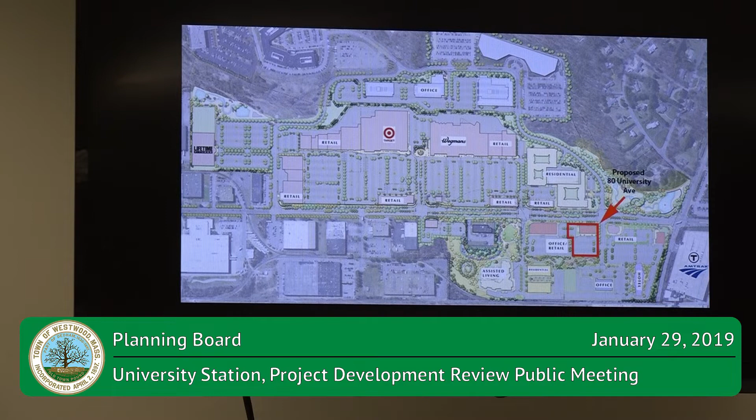This is the normal orientation that you've been seeing University Ave for some time. So remember, north is to the right on this plan, and to orient people, let's use the enlarged plan, and we'll work from there. This mic is not cooperating. So within what we call the lower campus area, the two-story office building where Meketa would be the proposed tenant is in this location here. Not Your Average Joe's there, Del Frisco's there, the recently opened Brigham and Women's in this location, and the residential condominium project that's under construction back in this corner.

This future office building with potentially some retail in it is something that we'll talk about a little bit further when we get into detail. We'll also talk in a little bit more detail in terms of the actual limits of construction for the proposal that we have before you this evening. But roughly speaking, the office building construction will include the parking field in front of it and then the parking field that's to the south of the building.

The future office building and this parking field would come with that future development. So what's before you is a project development review for this office building. It is nearly identical in layout to what the master plan is for this area.

You may recall that the master plan was modified back when the Brigham and Women's proposal was made, and then subsequent to that, the Pulte was approved this past year in the same plan that's always been shown on the master plan. So the office building that we're talking about this evening is in the same location as it has been. The future office retail building is also in the same location.

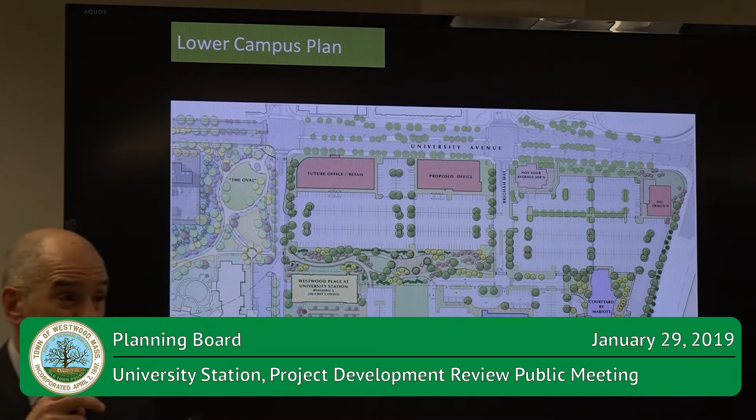Just let me run down my list and make sure we've touched on all of the primary site features, and then if there are more detailed site-related questions, then we can certainly get at them after Merrick's had a chance to run through his review. Trash and loading for this particular building is going to be located on the southern end of the building. It's here. Trash is all confined within the building. So the rollout containers will come out a service door on the south face, which Jeff can talk about a little bit more in detail.

There is bike storage that's being provided for the facility. There are bike racks on the outside of the building. The landscape plan was prepared by Shadley, who's prepared all of the landscaping plans for the development. The palette of materials is consistent with the palette that's been used across the development. And I think we had received a few suggestions from Merrick's group on a couple of different species swap outs, but it essentially satisfies what's been typically used.

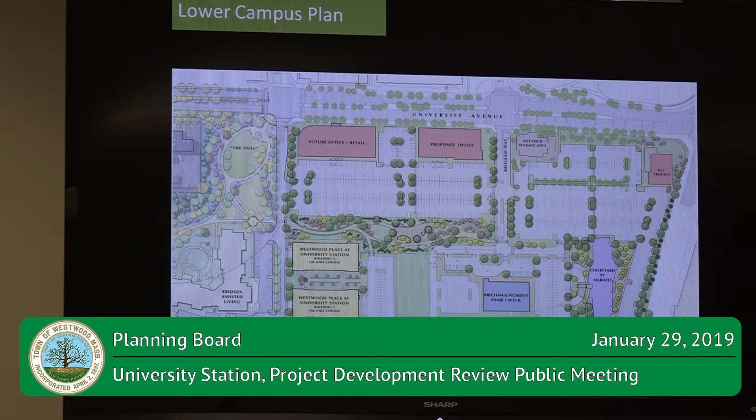Access and traffic and trip generation and all of that is also consistent with the master plan, so there were no changes to that. Last thing I'd like to touch on before I turn it over to Jeff is pedestrian circulation is also consistent with the pedestrian circulation diagram that we had walked through when we had prepared the master plan for this area.

All of the red highlights show the sidewalk connections that connect you to the main sidewalks up and down University Ave that get you to the train station, as well as the retail across the street, to the park spaces that are up on the northern end of University Ave, as well as the park space that's just behind the Dedham Westwood Water District building.

So we've been able to maintain those same pedestrian connections, and with the park in service now, it really provides a great link through the middle of the lower campus, and I think that with the occupancy of the Brigham and Women's building, you can actually see the physical connections, pedestrian connections through that park being made today.

I think I've covered most of the highlights relating to sort of the site aspect, the application itself. Let Jeff walk through the architecture, and then we're happy to answer any detailed questions after that. Okay, Mr. Jeff. Thank you.

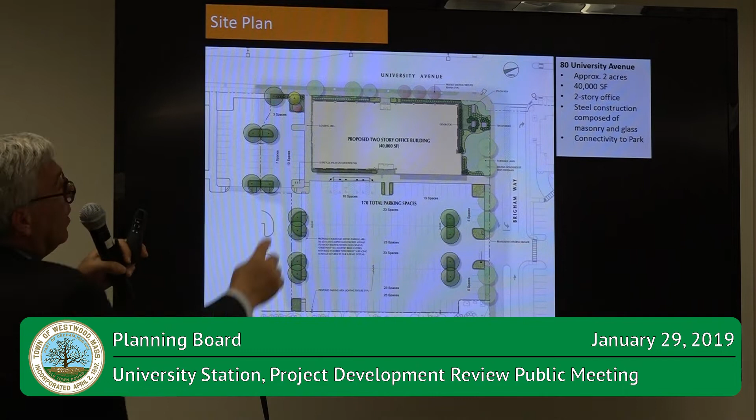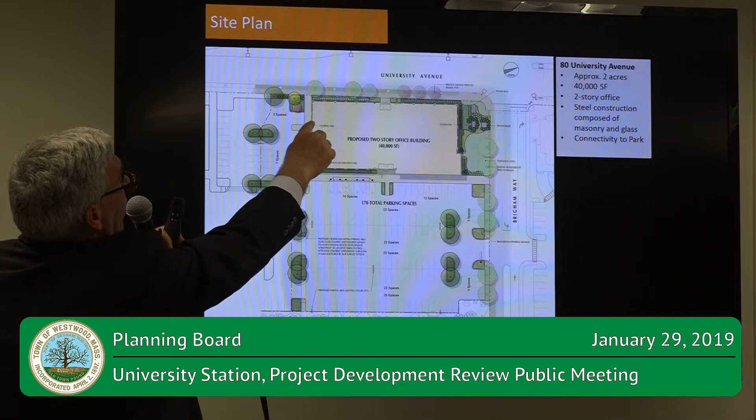We have a primary entrance here that's off of the Brigham Way side, a secondary entrance off of University Avenue. And when we get to the elevations, I can point out how we're identifying those entries architecturally speaking. There's an egress door over here, that entrance out to a lawn panel, the loading area up in here, as Paul pointed out, and when we get to the floor plans, I'll also point out how the trash will be confined within the building. And then there's also right here a little fitness door that the proposed tenant has asked us to accommodate,

for their program. One of the things that we really like about this location and like about this building is its connectivity between Brigham Way and University Ave, and it's a really prominent corner. It's also what's driven the proposed tenant to look at this particular location. Also, the park land that's behind that, and the smaller parking facility that's contained and not necessarily visible from a lot of the streetways that you travel. So it does have somewhat of a suburban but also urban quality to it, because all the parking is hidden.

From a floor plan perspective, it's a very straightforward, what we typically call a center core building, even though it's not exactly in the center. But again, our entrances are almost centered on the building, and we've worked pretty hard to try to not make them be perfectly symmetrical. Its length on the University Ave side is 205 feet, and on the parking side is 210 feet because of some of these articulations on the corners.

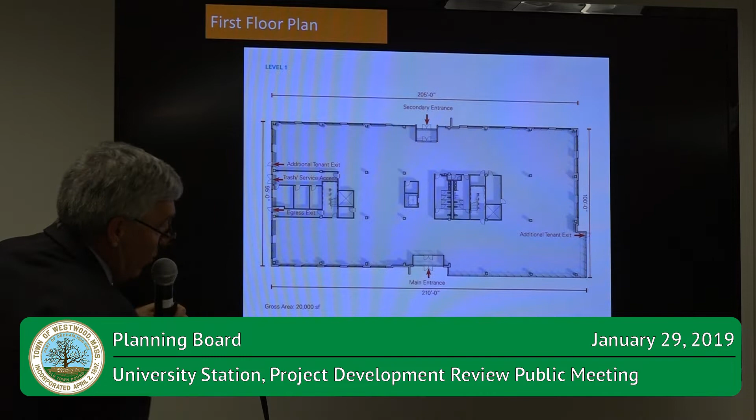We can see here our trash and service access up in here. It's an office use. There's no food service in here, so it's largely paper that would be leaving this facility, and that will be held in recycling bins, and those recycling bins will be picked up by a service. So there's no dumpster outside per se. We have also located an egress here, additional tenant exit there, and the primary entrance and the secondary entrance, and then an additional tenant exit over here onto that lawn panel that they might want to utilize.

Second floor, again, very straightforward, simple core, mostly designed to accommodate what I would call contemporary building occupants, which are largely open office spaces. We have not seen test fits for this plan yet, but we have talked to the proposed user's architect, and it's largely workstations with what we call huddle spaces that would be internal to the core.

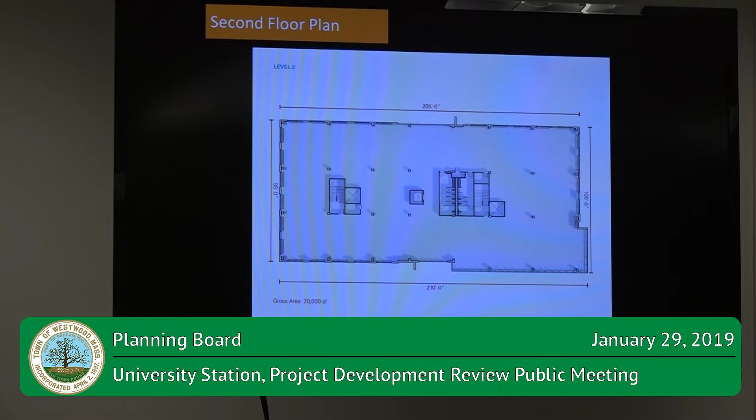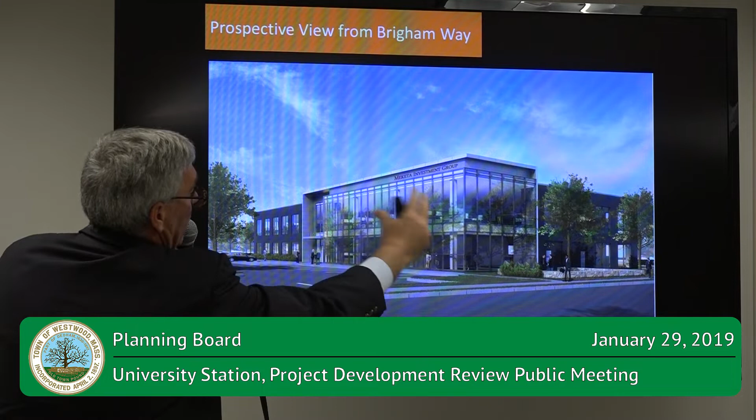This is the perspective view off of Brigham Way, and I'll talk a little bit about the materials here on the building as we walk through it. Essentially, it's a masonry building, brick masonry, with punch windows as the vast majority of the facade, with flourishes of curtain wall and metal panel to identify the entries and to give it a little bit more character. Right now, we have, again, punch window masonry over here, metal panel facade flourishes with two-story curtain wall at the entrance along the Brigham Way parking facility.

But we felt fairly strongly, and working with Mike Sinesi, we've come up with a solution we feel works really well to maintain an entrance on University Ave. We think that really is helpful to future-proof the building in the event that it's not a single tenant, it turns into a multi-tenant user, and people do start using the University Ave entry. It's also relatively important that that's a heavily traveled way, and that this look like a building that has a presence on University Ave itself.

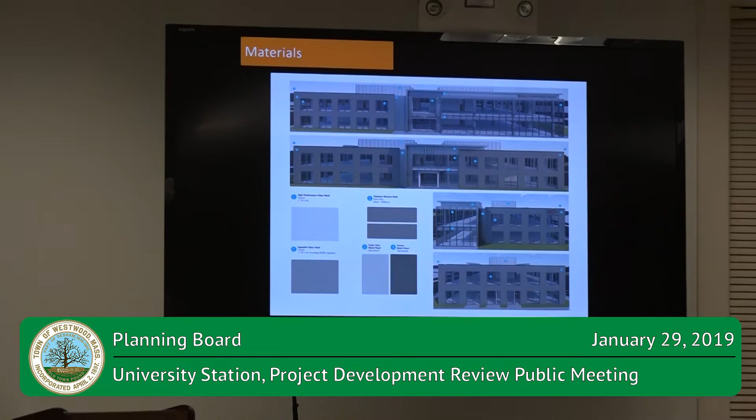From a materials perspective, Katie, maybe I will have you do the Vanna White thing. If you walk that up there, it's not that heavy. Yep. Bring it up here. So from a materials perspective, we've brought the actual materials.

It's a light gray brick in a Norman brick size with a running bond and a gray grout. We have a slightly gray glass. I did cut the back of it off, but we're inside, so it's probably going to reflect a little bit more than it really would. Spandrel panel in the areas where we wouldn't want to look through and see the structure of the building. Light gray metal panel for the surrounds, and a dark gray accent along the top where we have our standard metal coping, and then the lighter gray and the aluminum window trim for the building.

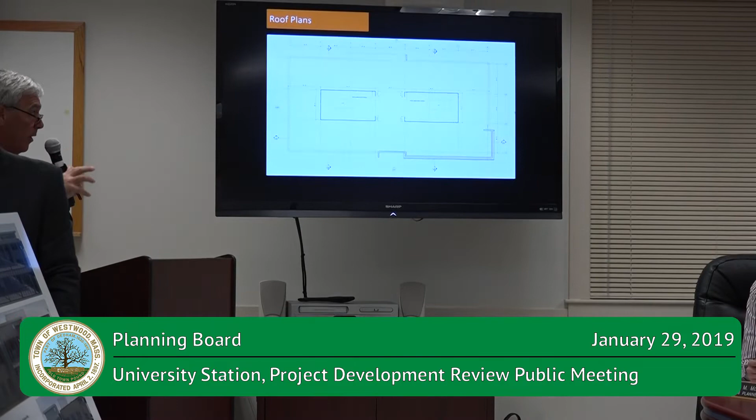Flip through this. And then from the roof plan perspective, I think it's important to point out that part of the design concept in both the entries, on the parking side, the Brigham Way side, and the University Ave side, these elements that rise up above the roof are both to help identify the entry, but also to help screen any mechanicals up on the building. We do have roof screens. Those roof screens and the mechanical systems are in the renderings, and they are the sizes that they are proposed.

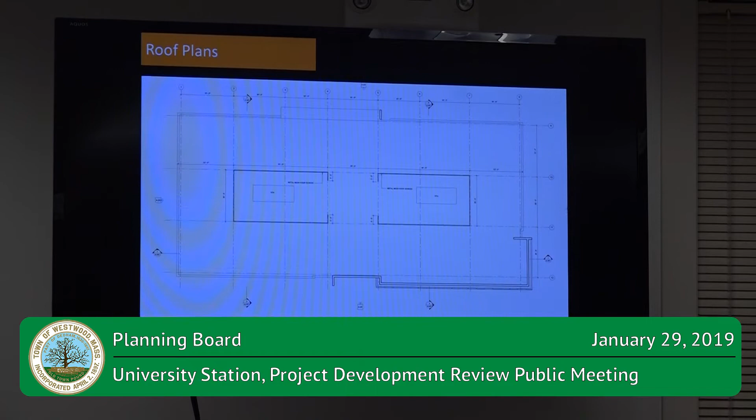So we feel we've done a fairly good job of trying to keep the screening of those materials consistent with what we would expect of an office building of this quality, but also so that we're just not looking at raw mechanical systems up on top of that roof. And that's really the presentation we have. So if there's any questions that I can answer or Paul can answer, we're certainly happy to entertain them.

Thank you. I had a couple of initial questions just with the layout of the parking lot. We had a comment about people accessing the building from the parking lot: why not have a center walkway? Because it seems like everyone will have to walk directly across the parking lot, and some places you'll have the walkway in the middle. I'm just wondering about that design. There are sidewalks on either side, where the trees are, but pretty much everyone's going to park and then walk through the parking lot to the entrance of the building. Is there a way to design it so that it's...

So certainly there's a sensitivity to trying to preserve as many parking spaces as we can. We'll be upfront about that, and there's a limited amount of real estate in this general area down here, and the sidewalks, as you say, are on both sides. So it's a matter of balancing the parking demands for the user with the space that we have, and optimizing what we can do on the relatively small site that it is. It's just at 2 acres. So we opted to not lose those half a dozen or so spaces that you'd need to open one up down the middle.

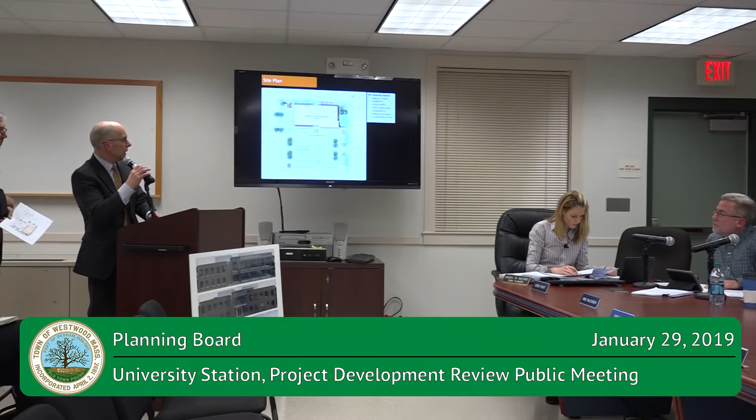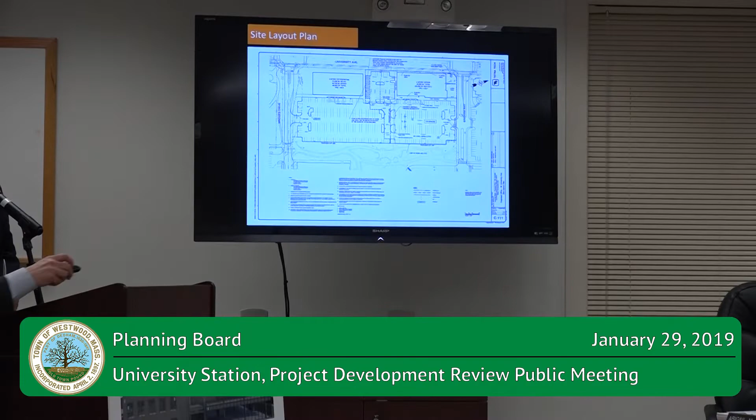Now I think it's worth, there is an exhibit that we have. So this is the layout drawing, which shows the paving limits that would come with this particular building construction. So it would be this entire lot. This would all be finished paved. The future spaces that might be for this building would be just a binder where they're apt to be impacted by construction. But this entire lot would be constructed, and then this travel lane would be constructed, and then everything in front of the building would be constructed.

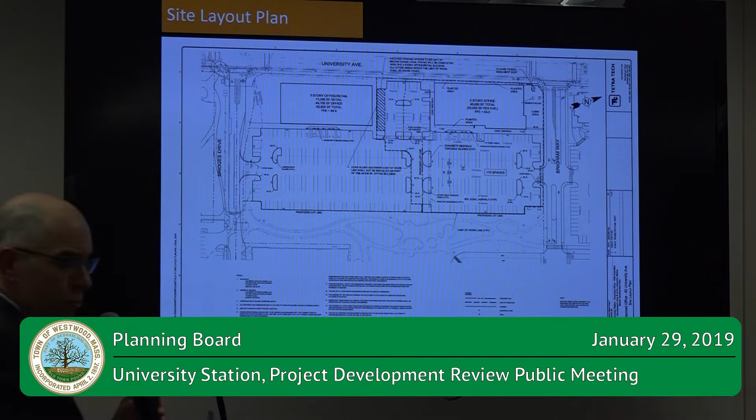This remaining area, as you're probably aware, a portion of it is occupied by the Pulte sales and marketing trailer. And the areas that are outside of what Pulte finished off for their sales and marketing trailer would be re-loamed and seeded. They're currently loamed and seeded in any of the disturbed areas. There's a grading limit shown on our grading plan, which shows that roughly speaking, about another 25 feet beyond the paving limit will be where we transition our grades to the existing grades, and then reestablish loam and seed in those areas that are disturbed.

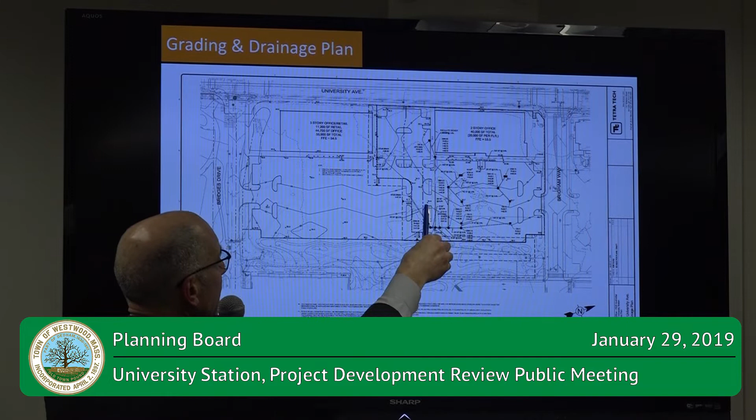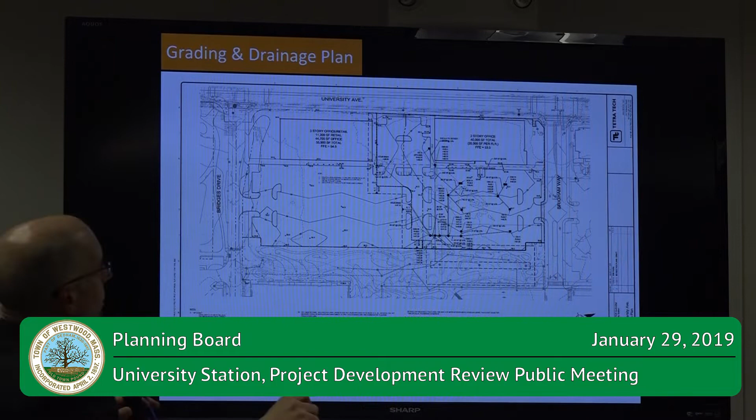One of the details that I neglected to mention is that the connection into the park, which has historically been shown on the master plan, is retained in this layout, and so there's a sidewalk that travels through an enlarged end cap island here and connects with that sidewalk connection that was anticipated in the park construction. So there is a path through, basically, like from University, you come down here and you're into the park. Is that? Yes.

I thought we had a landscape plan that showed it a little bit clearer. Abby, how do I get it back to the full picture? Yep, there we go. There, that sidewalk is connected back to the university.

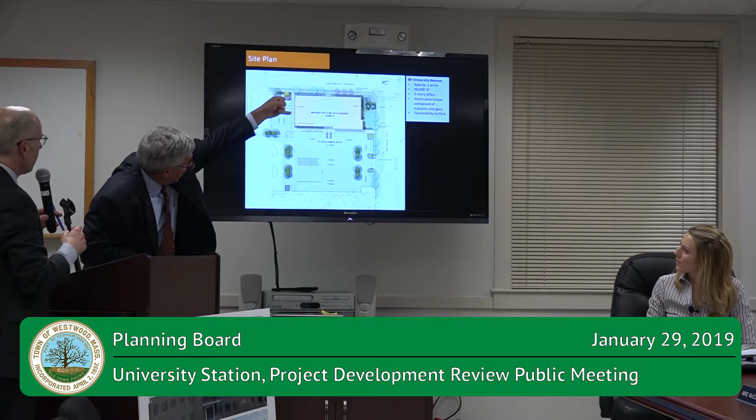And let's see, where are the bike racks? Is there internal, or are there bike racks on the outside? Okay, so there's kind of a path down there. There's bike racks pretty much interior to this structure, and then down to the park.

Abby, would we go to, are there other staff comments we should have now, or ask other board members, or what's the next? If you want to take board comments, we have Beta here tonight. We have Mike and Merrick here to report on theirs. Would you guys like to report on yours? Sure. Great. Thank you.

So my name is Merrick Turner with Beta Group, the peer reviewer for this particular PDR. I'm here with Mike Sinesi. Mike works on the architectural review. Paul did a very good summary. I think, as he mentioned, one of the most important considerations here is the fact that the framework for this site, or the framing of this site, if you will, was really done in the 2017 master plan amendment, and the general layout, general access, general configuration was established there, and this plan remains very much consistent with that. And as a result of that, key elements such as circulation, drainage, and so forth remain consistent, and certainly simplified the review.

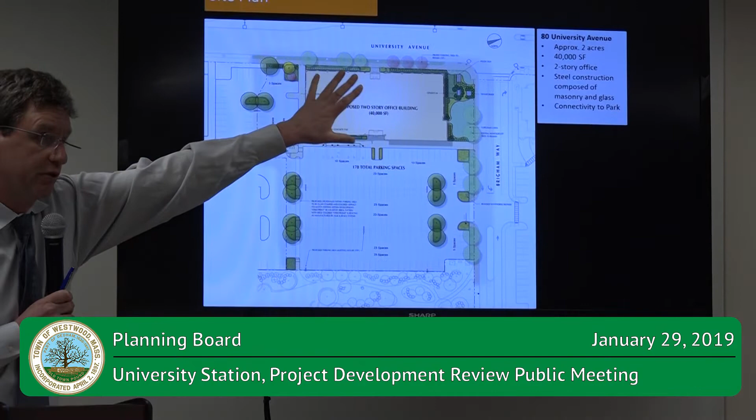There is, I believe, a minor amendment that accompanied this that has been administratively approved, because there was a small change in square footage, really a redistribution of the square footage between these two buildings. There was originally some retail space in this location, which was shifted over to the future building next to it, and in turn the office space expanded, but total square footage, total use essentially remained the same between the two buildings. And I believe that's administratively approved already, correct? Yes, okay. I did approve that last week as administrative approval that I uploaded in your packet, explaining that it was consistent with the master plan, but redistributed the space between those two buildings.

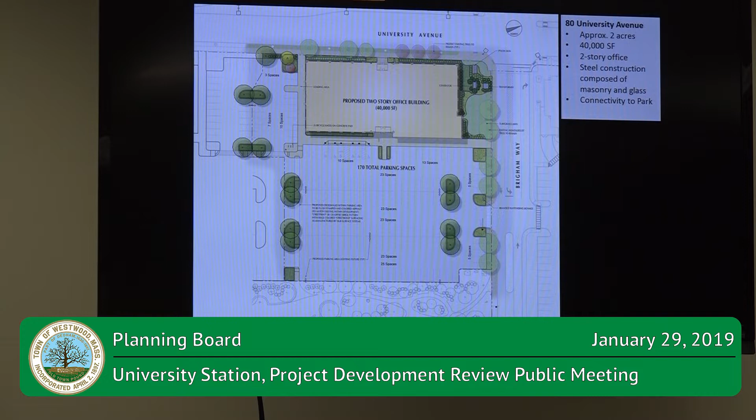So from a traffic standpoint, we certainly don't have any concerns with a small change in terms of what would happen on University Ave in terms of access to Brigham Way and so forth. So traffic and drainage are consistent. As was also mentioned, the landscaping plans are utilizing similar materials, similar palette to elsewhere in the development. The landscaper is the same company that's been developing the overall landscape plan.

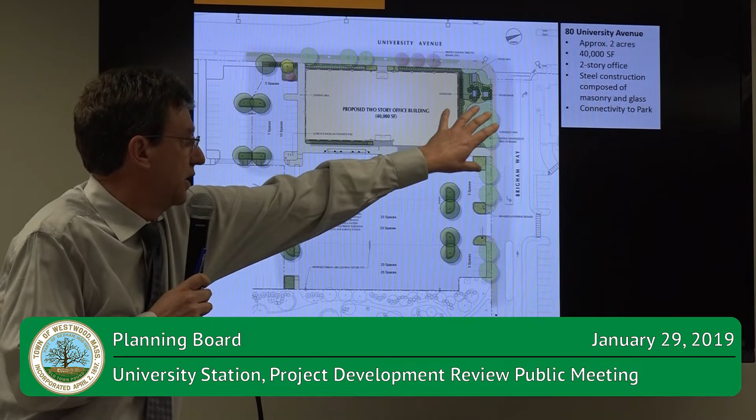There has, in some of the discussions, been some talk about a potential patio area on the north side of the building. I don't believe that's part of the current consideration. It doesn't appear to be reflected in the plans, and that's, I'm assuming, something that may come in the future if that's perceived as an appropriate use by the folks leasing the property.

In terms of process, as was also mentioned, we have one comment letter before the board. We've received responses to those comments. Many of those comments or responses appear to resolve quite a few of the issues, and those that are not resolved, I don't think we see any issue in terms of actually working our way through those and resolving them satisfactorily.

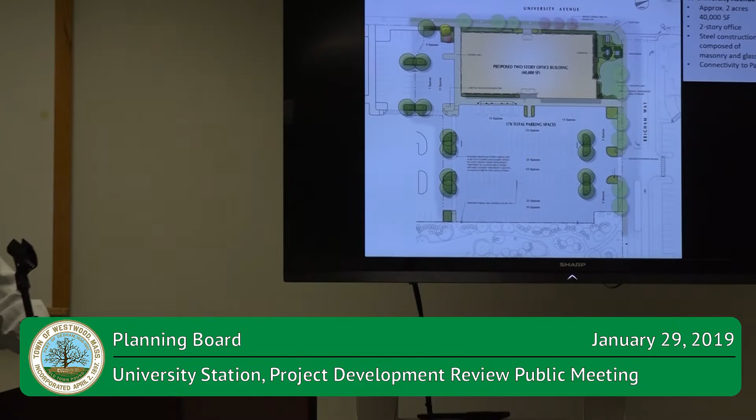In terms of some outstanding issues, as was just mentioned, there's a request for consideration of a slightly smaller parking space, 8.5 by 18. We do not have issue with that in this particular setting. It's something that I suspect the board is going to want to discuss. Public safety was mentioned. Again, the general aisle configurations and dimensions in the parking lot are consistent with elsewhere in the development, and we're hearing that the fire department is satisfied with the general access in and around the building, hydrant locations and so forth.

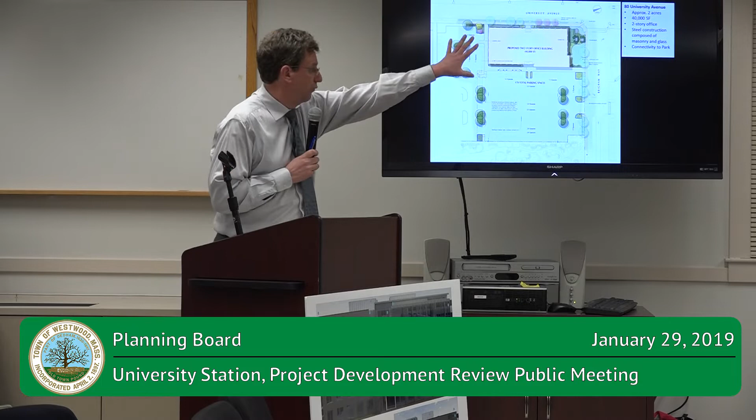The outdoor lighting plan, there's some revisions that we see being necessary for that. Just to clarify that the lighting plan for what is being built is actually satisfactory. The plan submitted in the initial application covered not only this lot, but the lot adjacent to it. So that just needs breaking down a little bit more. But again, we don't see a problem with reaching a satisfactory solution. The lighting standards in terms of the fixture types and so forth are consistent, again, with the overall development.

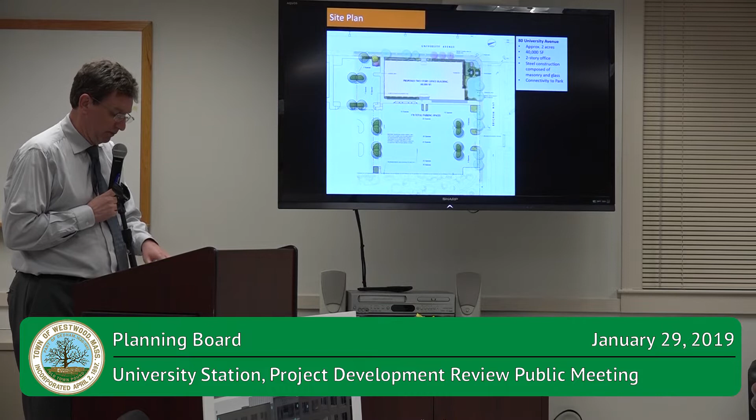Spill prevention, there was an O&M plan submitted. Generally the same format as that we've seen before. The O&M plan did indicate consideration of an emergency generator. There was some mention in response to comments that fuel type was undetermined. We would encourage that to be a gas supply as opposed to a fuel supply. I think any kind of fuel tank would be of concern to Dedham Westwood Water. The generator size, I would suggest we just understand that a little bit from a landscaping perspective, just to make sure it's properly screened. It's sited on this northerly corner here, next to the signage for the overall property.

And then in terms of signage, there was not a signage application as part of the actual package, so I suspect that would become a condition at such time a decision is reached. But overall, again, just to reiterate the fact that given the consistency with the master plan, we didn't see a lot of significant issues during the review. And I can have Mike just come up and speak to the architecture too.

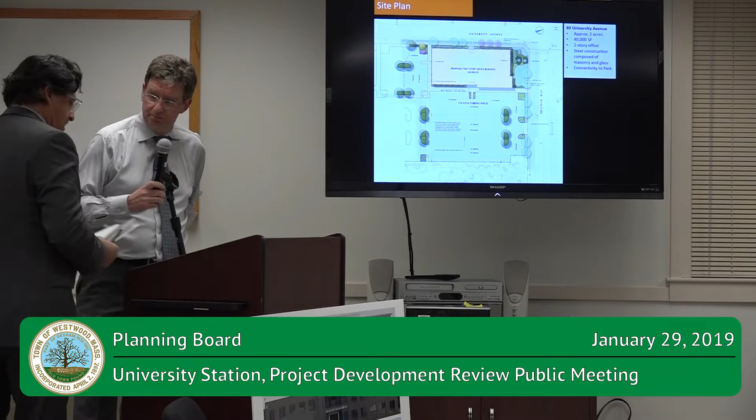Thank you, Merrick. Mike Sinesi, a peer review architect. I'm with DSK Architects. As Merrick just mentioned, we felt that the design as it came to us was very clean. There were just a few issues that we brought to the attention of the team, and those were quickly resolved. We were very happy with the overall design. It was consistent with the siting and the placement with the master plan, forming a strong edge along University Ave, and then opening itself up toward the south, toward the east, toward the parking area.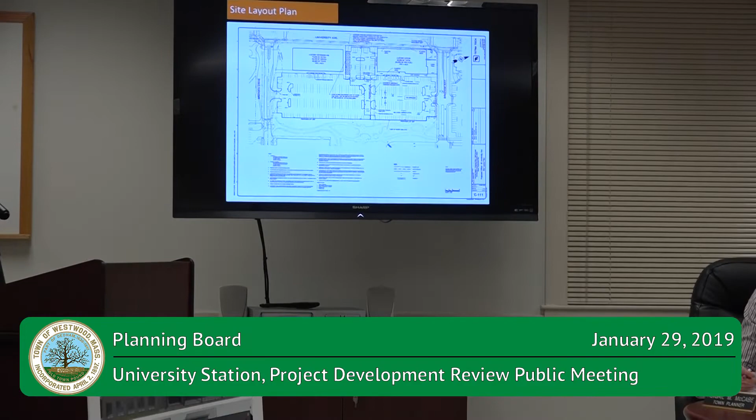So did the tenant or proposed tenant request all 170, or do you just want to get as many as possible? So in this instance, the lease with the tenant is to provide 170. Okay. I think mathematically it was about 4 and a quarter spaces per 1,000.

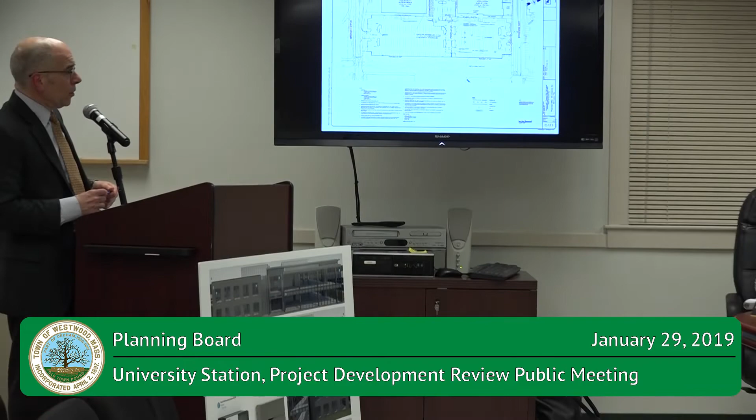And I know the building next door, is there a time frame that you have in mind of building that and developing that parking area? Right now, there isn't. Okay. But that's proposed to be the new retail office area, right? Correct. And what does retail do to the parking that the office doesn't in the new configuration? Has it changed, or does it remain the same? In terms of the number of spaces? Right.

Short answer is no. Somewhere in the 4 to 5 per 1,000 for retail generally satisfies most retailers. And time will tell with the kind of demand that comes for that building. And so there's no clear set amount of retail square footage or office square footage. As the master plan has been all along, we have placeholder buildings and uses.

And I'm looking at the one on the left. My concern is going to be revisited, as Mr. Atkins pointed out, that's just a lot of asphalt with no interruption, right? So again, not only aesthetics, but from safety, from just ease of use, I think a walking path there down the middle would be optimal.

Can you talk more about the trash? No dumpster on site? You said only paper leaving the site, but we all know people are having lunch in there. No, that's correct. So that'll get picked up by a service and taken off site at the end of the day. And held where? Inside the building? In a trash room inside the building. Okay. Is it the same with recycling? Yes, absolutely. There was a discussion that the design team had very early on.

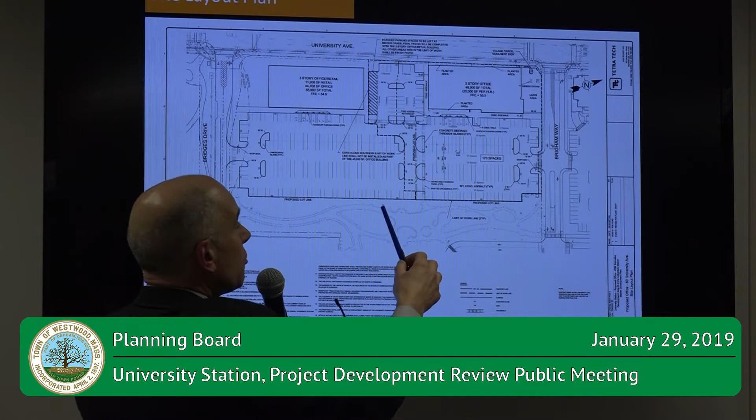What we agreed with Chief Deckers on is actually reflected on this plan. So the fire department connections at the building will be located on this facade. Their preference is as close to this corner as possible, and they wanted to be sure that they weren't working in between parked vehicles to be able to get their hoses connected up to the building, so they asked that we stripe out this space for fire department access and then sign it as such.

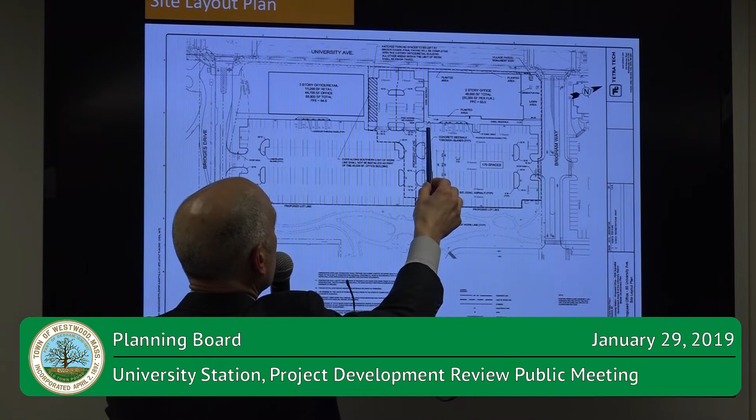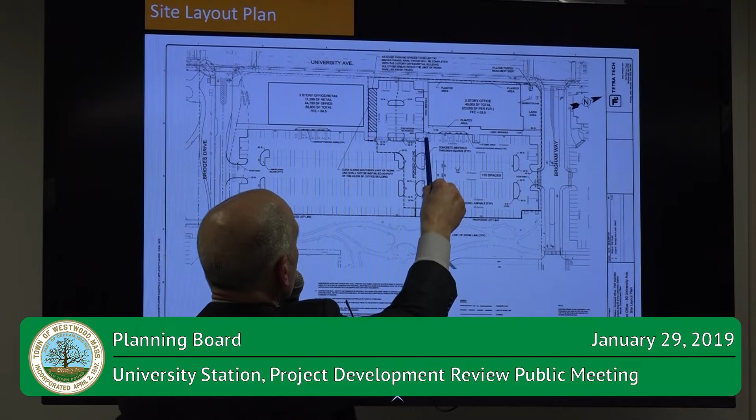So this space is eliminated as a parking space, and one of the changes that you'll see in the final drawings is this space was replaced with the space up there to offset the loss of that parking space. So now they're assured a pathway to the south facade of the building to be able to make that connection. Okay.

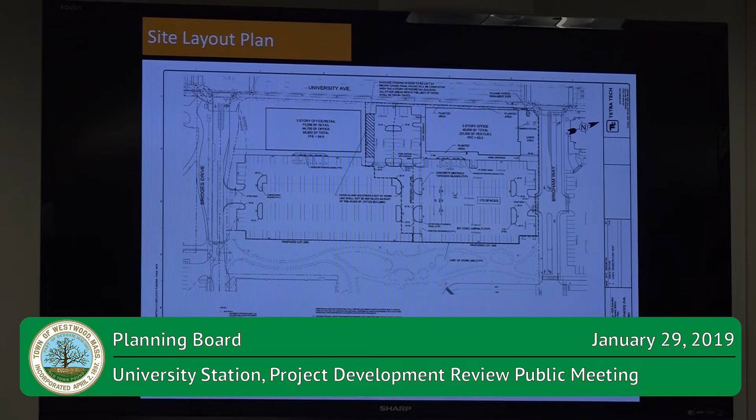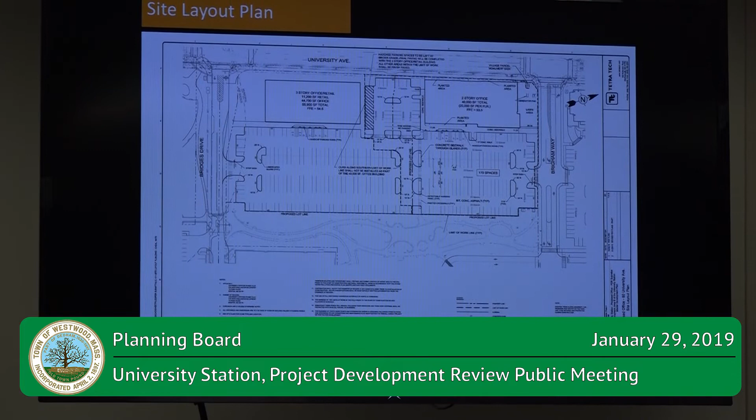And the last thing I wanted to talk about was architecture. As I understood, in the creation of the UAMUOD, there was going to be a relationship in how the buildings related to one another. And it seems to me that there's a distinct difference going down University from the train station. On your right are the Gables and Wegmans and the other storefronts that come up to University. On your left is Not Your Average Joe's, Del Frisco, Brigham, and there's a distinct difference to me in the architecture, and this represents more of the Del Frisco and the Not Your Average Joe's to me.

And I think it was fine, but those were developed far away from University Avenue in the original part of the project. And it seems like now we're moving back towards the project, but we're maintaining that architecture that started away. And I look at this, and right across the street is the Gables, and I heard Mike mention some relation, I can't recall exactly what you were referring to, but I see two entirely different architectural styles, at least in my mind's eye, of what the Gables looks like.

And I just have a little concern, not that I don't like what this looks like, but are we honoring the UAMUOD from the outset, that there's a relationship between the buildings throughout the whole project, or have we migrated away from that, because that still is in our bylaws. We have to honor that. So I'm a little concerned that now that we are moving back towards the Gables and phase one of the project, the two don't look at all similar to me.

So I don't know if Mike can speak to it, I know you were satisfied with that, so I'd like to hear a little bit more about why you're satisfied. My knee-jerk reaction is this looks entirely different from Wegmans and Gables, and I don't see anything that is remotely similar. Sure. Mike Sinesi again.

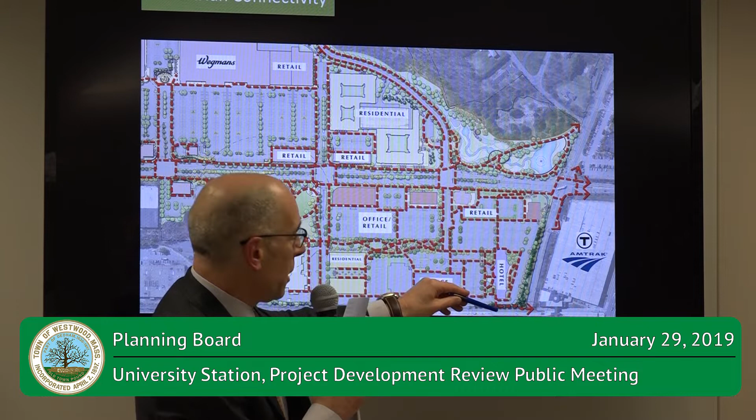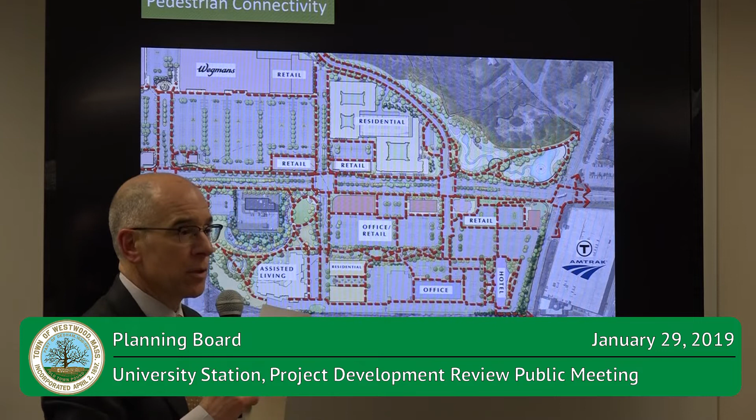It's behind the hotel building, so the courtyard is here, and some of you may recall the details where the sidewalk is nearly fully constructed down to the property line with the railroad, so it's grassed right now and ready to receive pavement just as soon as Amtrak grants us permission to utilize what is an emergency egress door today, which would be converted into a public access door. And that's the idea that's been around since the inception of the development. It's just been hard to get Amtrak's focused attention on it. And so we continue to call on a regular basis and prod that application.

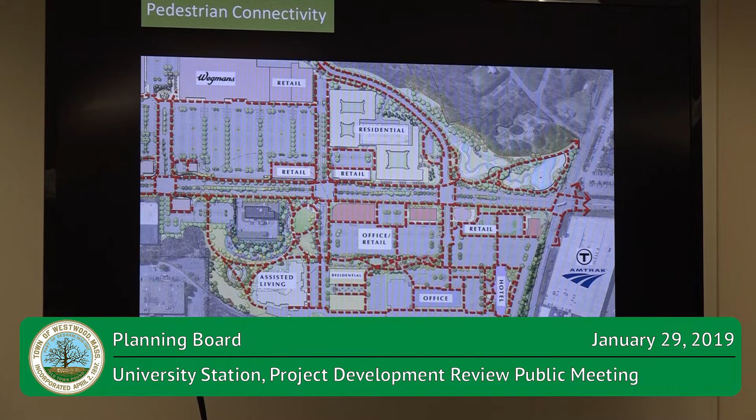All right, I remember we discussed this with Del Frisco's, we discussed it with the hotel, we discussed it with Pulte probably, and so you're saying that you're ready to go as soon as you get the approval, which has been out there for 2-3 years. Correct. Waiting.

We've engaged folks from the T as well to try to help and influence moving this along with Amtrak. Jurisdictionally, Amtrak has jurisdiction and responsibility for the train station building itself, and the T has responsibility for the parking structure. So that's how it's divided. So it's an Amtrak matter, and we've had materials into them for, as you say, at least a couple of years, and I think it's a large organization. It probably is not one of the biggest requests they're dealing with, and trying to get their focused attention on it has been a challenge.

Does the decision-making lie solely within them, or do they have to answer to Homeland Security, or are there some bigger concerns why this might be being delayed?

I'm not sure that it's actually Homeland Security that weighs in, but we certainly think that in, let's say, the almost 8 years now, really since the start of this conversation, which was in 2011 and 12 when the master plan was developed, and for those that go back even further in time, this was an element that came out of the prior project that was retained in University Station. So it's in excess of 10 years.

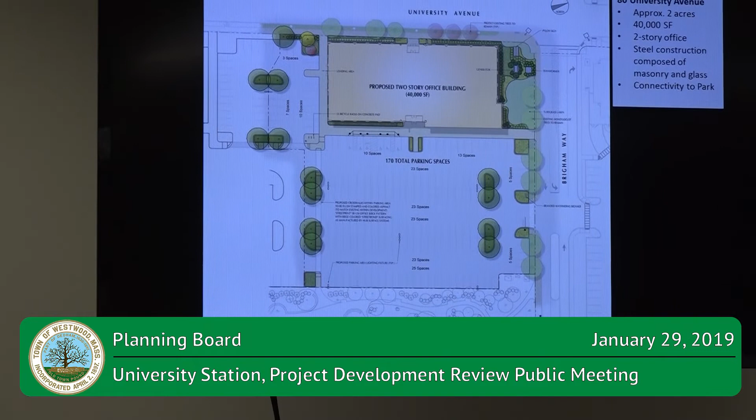So for the immediate future, when this building is not adjacent to the future building next door to it, the lot that is to the south of the building, the side lot, if you will, the one that fronts right on University Avenue, will be built out in its entirety. And the designation of spaces involves only half of that lot, so I think that serves as the overflow for the time being. And then once the second building is constructed and it's essentially one continuous field, then in practice there really will be a little bit more of a shared.

Until that time, I see them parking at Not Your Average Joe's, because no one's eating lunch at 8 o'clock in the morning. So it's going to be open. Sure. That's where I would park if I was forced and there was nowhere else to go. Well, right, I'm saying if that was even full.

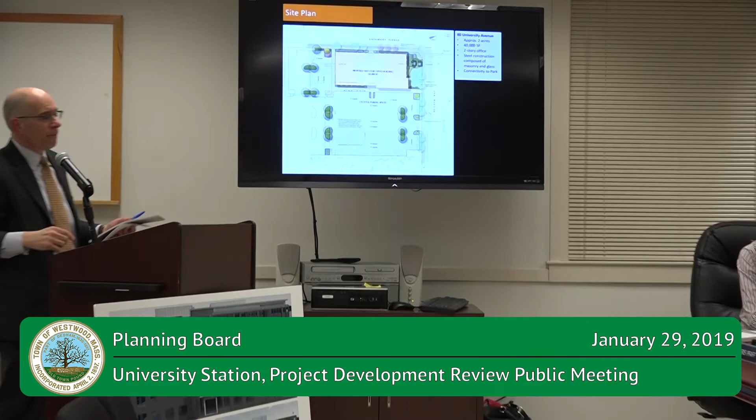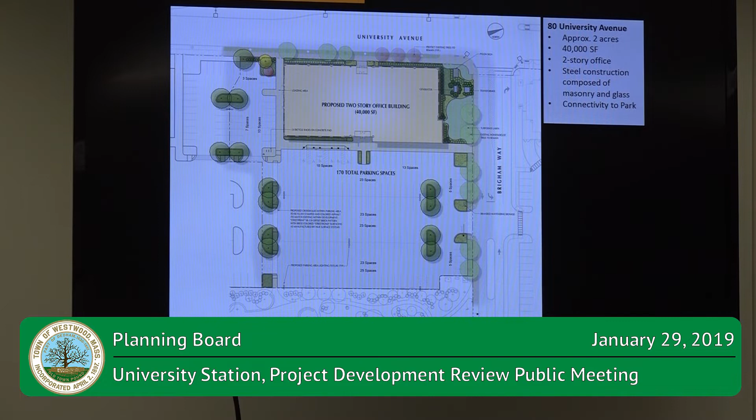If that's full, right. And I think if that lot is full and there truly is an overflow into the restaurant parking area, then we're pushing numbers that would exceed, or certainly be bumping up at, 5 per thousand, which we just wouldn't expect here. And it surely becomes a parking management problem, but frankly, we need to manage the restaurant parking area very carefully today and have been for years because of the temptation for people that are using the commuter rail.

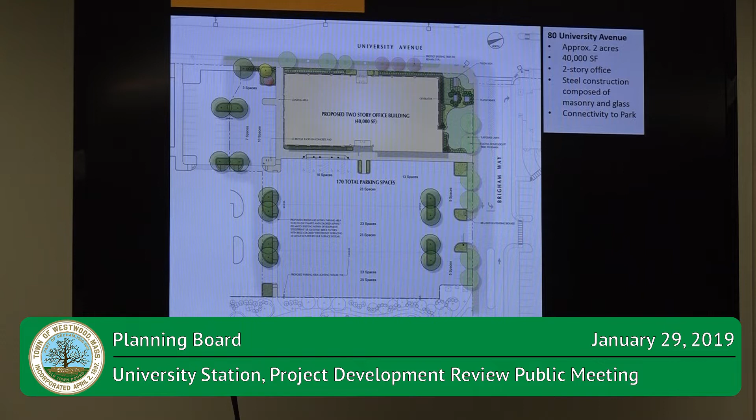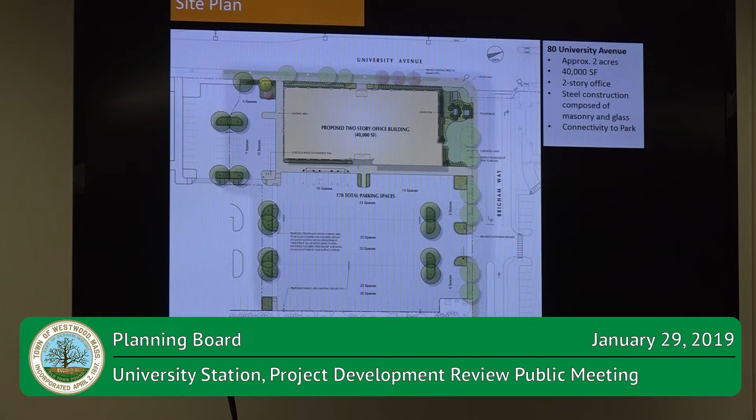I think having that pedestrian walkway down the middle for an 8.5-foot space, for me, that's acceptable. I think it also kind of breaks things up so that instead of having that long row, what you're proposing now is a bunch of 8.5 spaces down, there's 23 spaces next to each other. So if you break that up and you have 10, 9 and 9, that's probably a little, in addition to having the safety of the central walkway, the closer together spaces, there's less need for people to cut between the cars. So, yeah, I would tend to favor some redesign that includes a central path.

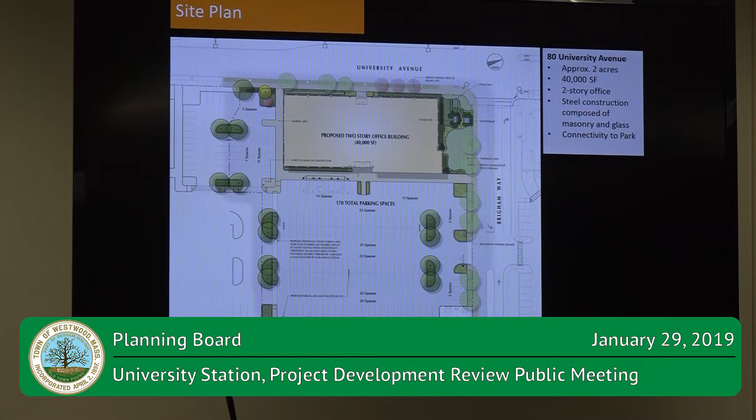Yeah, so I make a motion to continue the review of the project development review to the next meeting on Tuesday, February 12th, in the same room at 7 p.m. at 50 Carby Street. And we request that the applicant submit revised plans addressing the comments from tonight's meeting, and Beta's comments as well. Second. I have a motion and a second. All those in favor? Aye. Aye. Any opposed? Any abstentions? The motion passes. This will be continued to February 12th.

Thank you very much. Thank you. Thank you. Abby, we'll leave the material boards with you folks. Okay, yep, sure. We can, want to stick it back up there? Thanks. Oh, yeah, that's fine. Thank you.

Okay, the next item on our agenda is 200 University Avenue. This is a continuation of an EIDR public hearing. It's been continued from September 5th. Please take your conversations outside. We still have a meeting to conduct. So this is 200 University Ave, you may come to the podium and present your updates.

Hi, Albert Fine, Fine Associates. I've been working with this owner for about 20 years. I'm the architect of their current headquarters on Dartmouth Street. They also have investment properties that I have worked on. Simply put, the interior scope of the building is code compliance. We have already put in fire alarm. We've already retrofitted the sprinkler system to code. We're going to do some minor finish work. And then there's no real reconfiguration within the building, and one egress stair will be added over here, because there are 3 suites and 1 suite does not have sufficient egress.

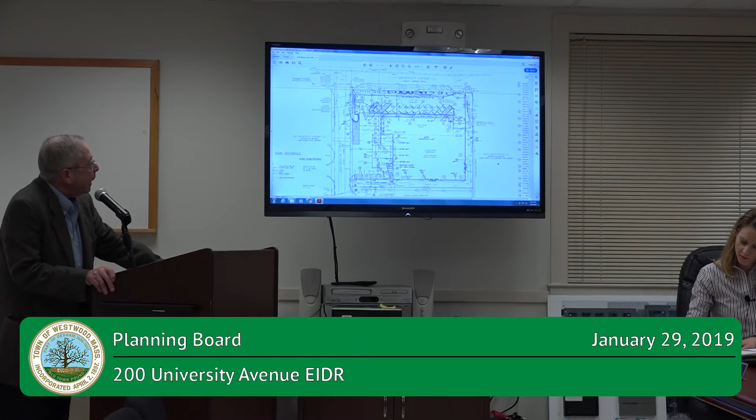The exterior scope includes tearing off the roof, which is very, very old, and replacing it with code-compliant insulation, a new rubber membrane, and associated accessories. We intend to reconstruct the entire parking lot, put in compliant drainage, put in compliant lighting, and straighten out the utilities. So to talk about the parking lot is Bob Crucial, who's the engineer from Hancock Associates.

The property is 43,560 square feet, or exactly 1 acre. The parking requirement is 25, and we provided 25. They're indicated by these squares. Each zoning space, according to zoning, has a box 1, 2, 3, 4, 5, 6, all the way to 25. Circulation works like this. Cars going northbound come into a one-way. The one-way parking configuration, sizes, the travel aisle, they all meet zoning. Then it transitions into a two-way. Keep in mind, of course, we all know this is a retrofit, so we don't have the ideal situation; the building exists. So it transitions into a two-way, and we have parking spaces here lined up against the building.

Currently, there are 4 truck docks on the building. 2 are going to be retired, 2 will remain active, the 2 center ones. The ones on the outer edges will be retired. There'll be enough truck bay for 2 trailers in this location here. There's a concrete pad that exists, and that will remain. Then we'll have the remainder of the parking off to the side here. Drainage is all compliant with the stormwater management ordinance.

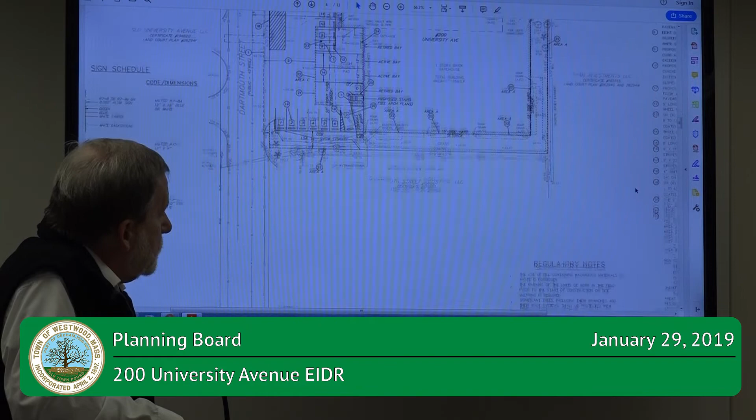What do we switch to? Okay, it's a little hard to read here because of the contours. Contours are half-foot intervals. The drainage is rather flat there, so in order to make sure there's positive drainage everywhere, these are half-foot contours and not full contours.

What we're going to do is put in a catch basin here at the entrance off University Avenue. It's going to connect to another catch basin here. The positioning of those 2 catch basins allows us flexibility to put in the ADA parking. The ADA parking will be here to serve this portion of the building and that entrance, and then another ADA space over here to serve this entrance over here.

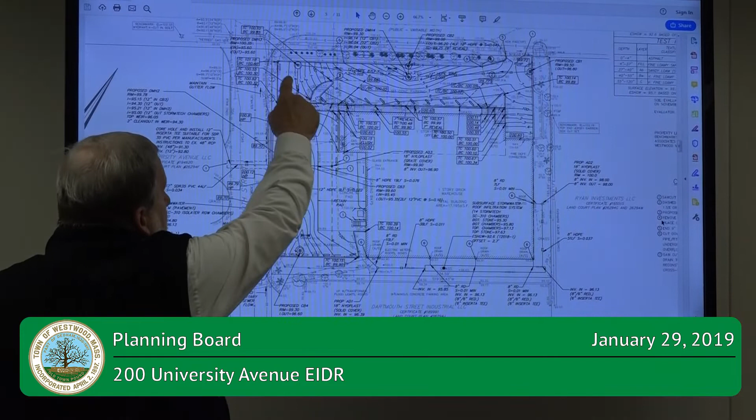That allows us to flatten out the space. You can see the contour interval here, it gets wide apart. That means it's 1.5%. And then the fact that it's on this side allows us to get into the building easier, provide a flat spot, and then provide positive pitch in the drainage system on the far side of the parking lot. The high point here, drainage to those two catch basins is flowing in this direction.

And then out here in the main truck area, we have another catch basin in the center. And then we have a catch basin on the easterly side; some of you may have visited that site. Right now there's a tendency for ponded water to sit right there, so we put a catch basin there. And that's going to be filtered. We've got treatment chambers here, StormTech type. So water is treated here, first 1 inch, and then the overflow goes to a connection to the 48-inch drain in Dartmouth Street.

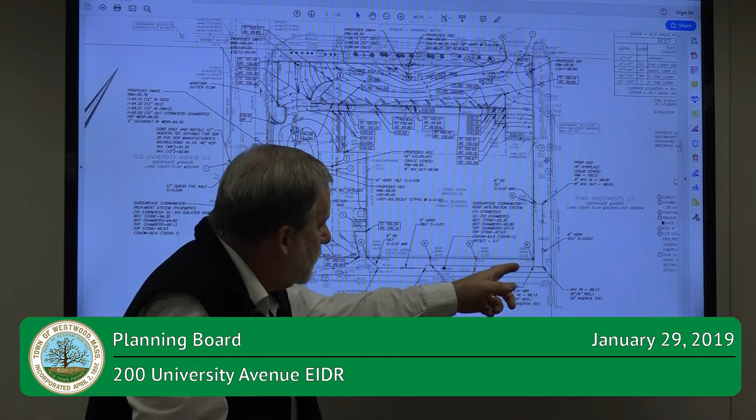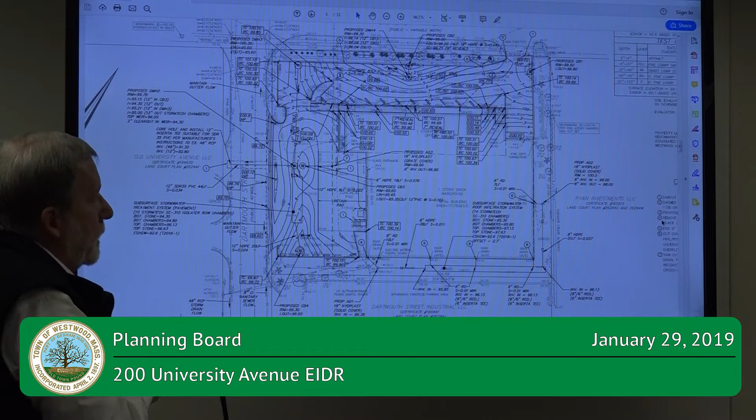We've also provided infiltration for the roof, 1 inch. There's downspouts in the building located here, here, here, here, and here. We're connecting them up, putting them into a similar array of StormTech underground chambers, 2 feet of cover, into the ground. Soils are good, and we don't expect any problems with the infiltration itself. The utilities are all there. If you go to the next one.

Right now, the utilities are water, sewer, gas, and this is the communications and overhead power. These are all in place, and there's no expansion of the building, no more loading necessitated by what we're proposing to do. We do have a couple of issues with crossing. We don't know exactly the elevation of the utility, so we're calling for some exploratory test pits as the first step of the contractor's work.

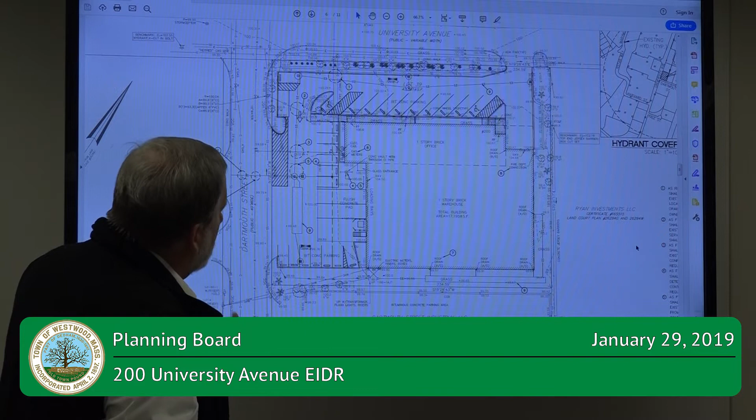So, as an example, he's going to test pit this drain where it crosses the water. And if there's any kind of a conflict, we'll know that right up front in the work, and then we can deal with it, relocate the water if necessary, and that sort of thing. I think that's about it. Happy to answer questions. Thank you. Did we have any immediate questions?

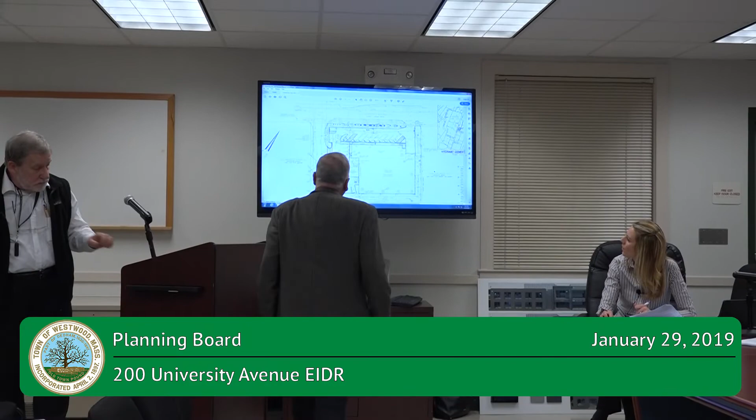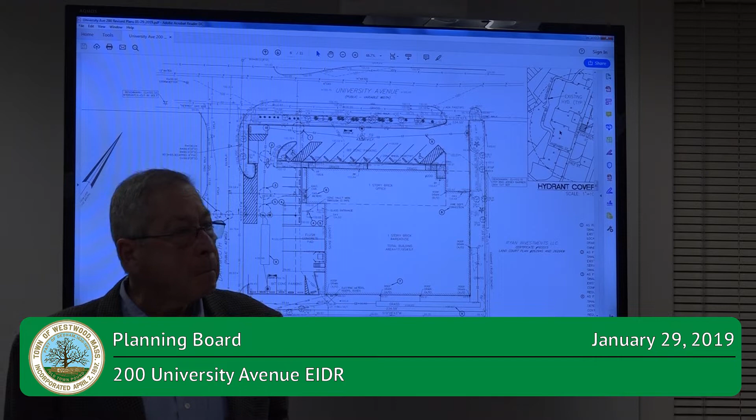So where did you say the main entrance was to the building? There are actually 3 entrances. 3 entrances? There are 3 suites. This is an entrance here, which is to what is mostly warehouse. This is an entrance here, which is office here and warehouse here. And this is an entrance here for about a 1,000 square foot office suite. And there's accessible spots, because the last time I was down there, there was one spot that was further away from the main entrance. So those will all have accessible spots near them? Yes. There and there.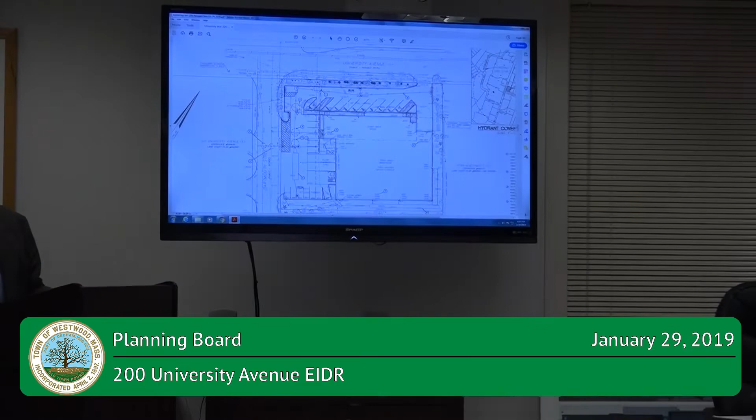Let's see, we had a report from Beta on this also, right? Right. We have Merrick here tonight from Beta, he's filling in for Phil, but you did get a memo from Phil and Chris of Beta. There was some back and forth with some requests, but we did get some revised plans on Friday and some lighting plans yesterday that were uploaded in your packet. But I think the only outstanding item was the request for the lighting.

And the lighting plans that we got yesterday, there was just a dark spot in the rear parking spaces, so I would ask for a final revised lighting plan that includes lighting those spaces in the back there. But otherwise, all the stormwater comments were included in Friday's submission of an updated stormwater report and the updated site plans. So could we make that a condition for the lighting plan? And we're fine with that.

What I'd like to do is have the opportunity, the lighting is being done by Apex Lighting, to have them see if they can spread the fixtures apart a little bit more, but if we have to add a fixture, we have to add a fixture. And where did the bike rack end up on there? I was trying to find that, but...

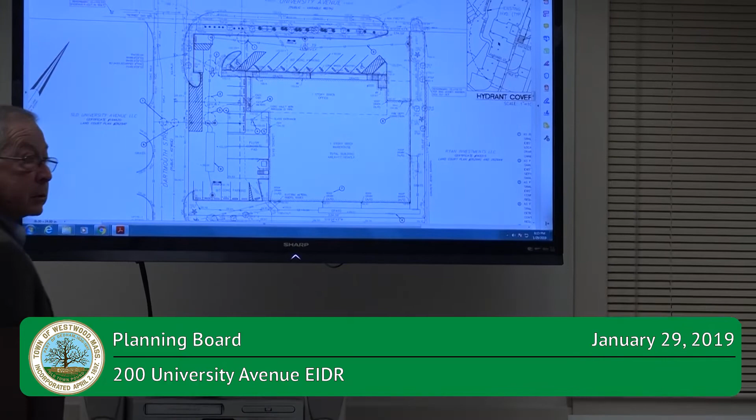Okay. So that's right near the warehouse, the entrance that's the office and warehouse. Well, there are other places to put it. It may actually make more sense to put it near one of the office entrances, the bigger office space, because that's likely where more people will work. Yeah, my thought is that it's likely there could be an employee who would bike commute. Sure.

Not much use by the warehouse, but I don't know, maybe the person is. Eventually, as you probably know, the contents of this building go to 240 University Ave. When Dacon's project at 240 University Ave is done, they will move all of this product. The product in the building is their oversupply and discontinued items, because they have clients around the country. When a lock breaks, they need another lock that's 10 years old. So the likely scenario is this will be rented. So we don't know what's coming.

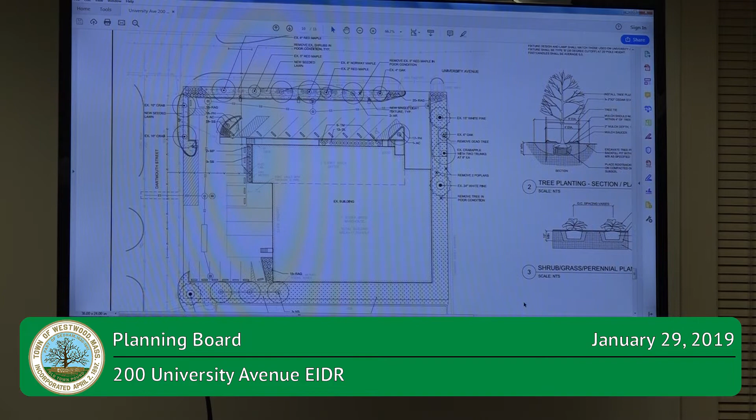Let's see, if there's no other questions, I know there are a couple of waivers requested, right? There's the traffic impact study and presentation model. Yes, those are the two waivers. So I move to waive the waivers that you just mentioned because they're not necessary for the scope of the project for the redevelopment of an existing building. Second. I have a motion and a second. All those in favor? Aye. Aye. Aye. Any opposed? Any abstentions? So we grant the waivers.

Let's see. Merrick, is there anything that we're not addressing that Beta is? I'm looking at Phil's memo here. The only thing that he highlights is the lighting plan, which he calls out as a condition. Everything else looks fairly clean. Issue resolved. Stormwater was all updated satisfactorily.

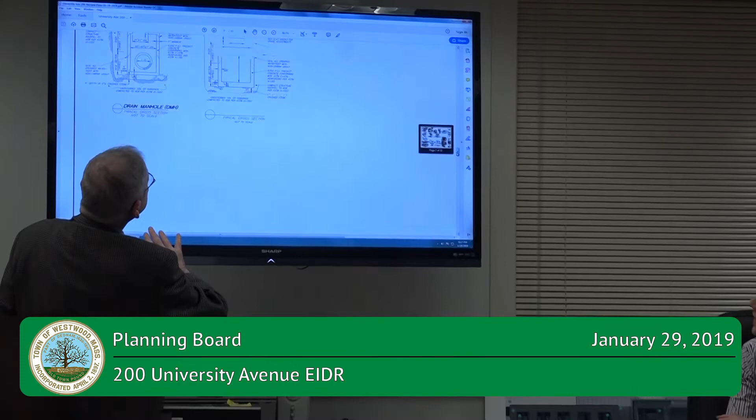I see one here, a dumpster or trash location. Did you point that out here? I didn't. I forgot it was. Identified a wood screen, but I've got issue resolved here. I did see it on one of the other plans. This is the landscape. Okay. As long as, right, okay, here. And Abby, you're satisfied with how it's presented? Yes, so that was one of the revisions, adding a dumpster and a bike rack over here. That's a good spot for the dumpster, because that's probably where the most trash is going to be generated, given that that's a warehouse. The warehouse, right.

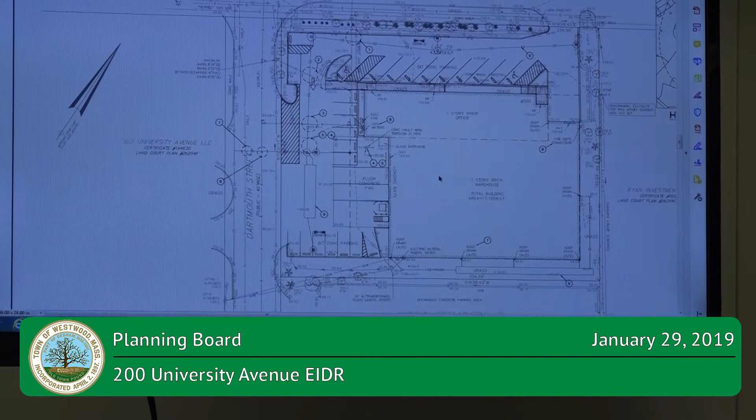Okay. Is there any public comment? Would anyone like to say anything from the audience? All right. Oh, and I'll just add, the applicant has also filed with the conservation agent under the stormwater bylaw for that additional stormwater review. Should we go through each of the conditions? Oh, yeah, so I had prepared a draft of 11 conditions.

Most of them were pretty standard, but condition 1, to summarize, was that the dumpster be screened at all times and the gates be closed. The exterior lights be turned off an hour after close of business unless they're security lights, and request the applicant to submit the final revised lighting plan to me for review and approval. The trees and the landscaping, there were a few trees being added and some new grass out front, some plantings. Those should be done prior to occupancy, unless it's done prior to April 15th, and we'd recommend a condition that the landscaping be completed by May 30th.

The applicant shall contact the Department of Public Works at least 48 hours in advance to be present during the site work for the drainage, to inspect that. That there's no use of sodium chloride rock salt for de-icing or snow removal. The applicant shall repair any damage that may be caused during construction to the roads or anything in the right-of-way, first contacting the Department of Public Works. The applicant shall submit the asbestos survey to the building commissioner and health department. Also, if there's any need for licensing with the Board of Health, that's also required for the construction debris. And the applicant is responsible for any other filings that may be required and keeping a copy of this decision on site during construction.

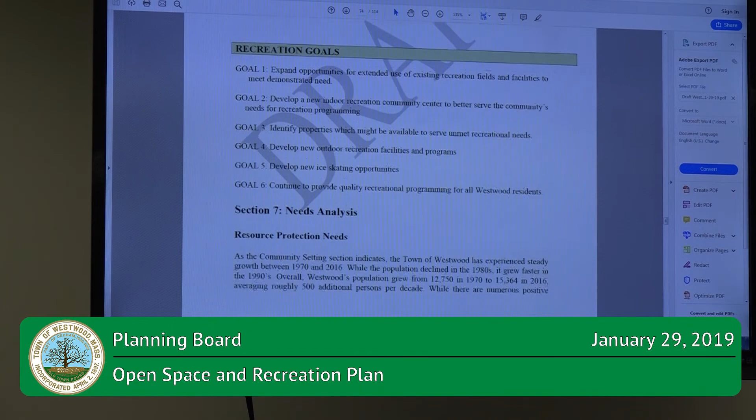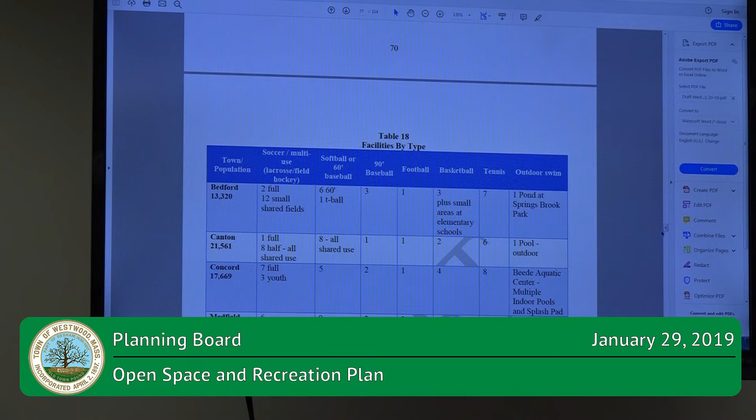I think that there should be, and as I think we saw in some of the comments, accessibility should be a part of these goals, and maybe as a general goal to ensure that all these enhancements are reviewed to make reasonable efforts so that what's done will be accessible and usable for all residents. That sounds like something to apply to all of the goals. Say instead of thinking of increased ice skating opportunities, you'd say, well, let's have a rink that can be used for hockey and for public skating and for other things.

And so right, generally, we can combine goal 2 from the recreation goals with goal 5. I mean, we need indoor facilities, and we need an ice rink. We've needed a lot of those things for many years. They can be combined into one project. All right? We can lay them out as individual goals, or we can group them together.

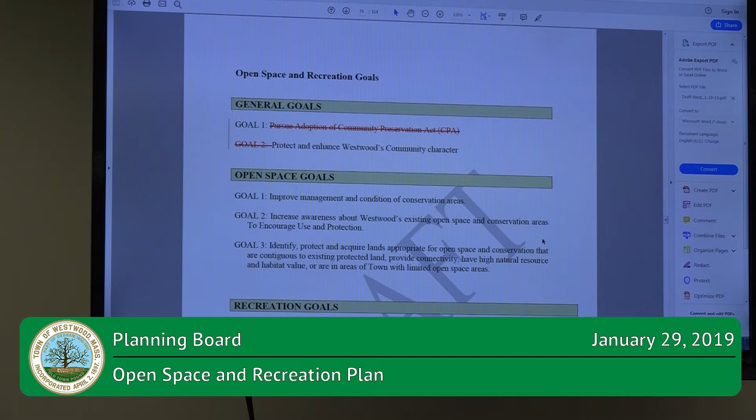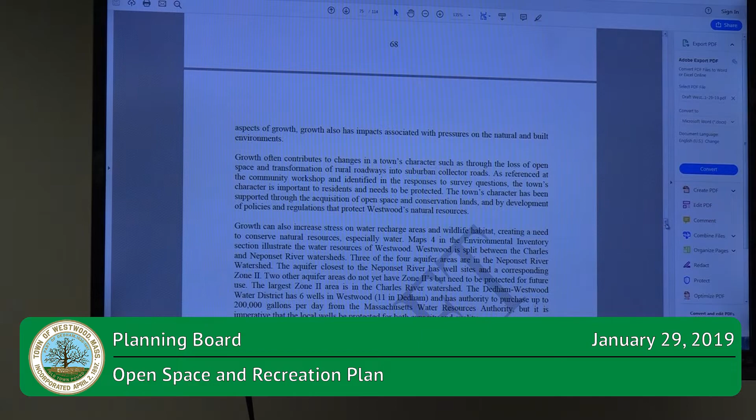As long as we're moving in that direction, I agree, it doesn't need to be so specific as to what's going to get done, when it's going to get done, and how we're going to fund it. It's basically just a template or a roadmap of where we want to get to. If we make it too specific, then we're going to have pushback from people who want to go another direction. They don't want this. And it's not about getting this or getting that. This is the direction we want to move towards.

Yeah, I think Dave was okay with that. I think he just wanted to add accessibility, and I'd be surprised if that wasn't in here already. Forgive me if I misunderstand, but I'm not really sure what you mean by accessibility. Well, for the open space items, say there's a parking lot at Lowell Woods, there should be some handicapped accessibility to that. Maybe there's a need to have better parking for that. There's that type of accessibility.

There's also accessibility in the sense of, like for Morrison Field, there's not enough parking, and we're relying on the parking at CVS and everything. We should think about, are there ways to use other parking lots? Whenever we expand these types of things, we should think about making it accessible so that people can get there and do the event there. For Morrison Field in particular, there might be an opportunity to have a walking path that goes over to parking lots that are privately owned back on Wilson Way. Maybe talk to the property owners back there and see if something can be worked out for shared parking. Just think about making these activities available to everybody. So that's the physical access, parking for everything.

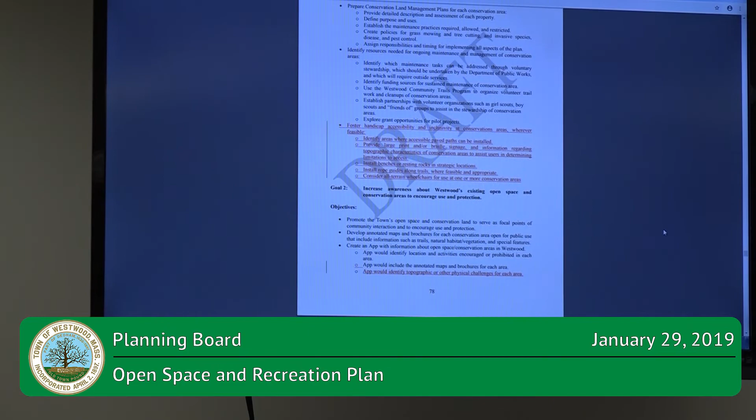So I think that's good. Like, I just want to pull out these issues and see what we can incorporate. You need feedback from everybody soon, right? Yes. Email to you. Right. So we are looking for any comments. I only received specific comments from Dave, but if anyone else has specific comments.

So right now we have... Yeah, my comments were applied, being part of the original committee. Brian was on the Open Space and Recreation Committee that met over the last year. How does the CPA language look now when you moved it to the actions? Where did it go? I just want to make sure that it's going to be okay. Where was it?

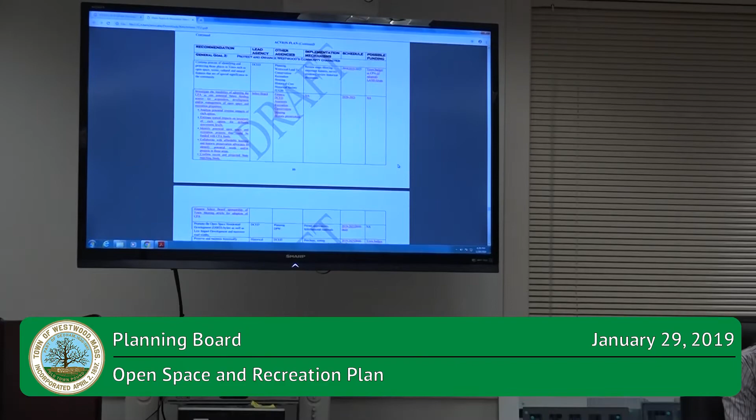So it's in the action plan on page 86 under General Goal 2. So we kind of placed it there as to investigate the feasibility of adopting the CPA as one potential funding source. Okay, so it's investigate the feasibility. Yes. I think we can even go so far as to support it. But we can't make it a moratorium on whether or not the CPA passes at this process?

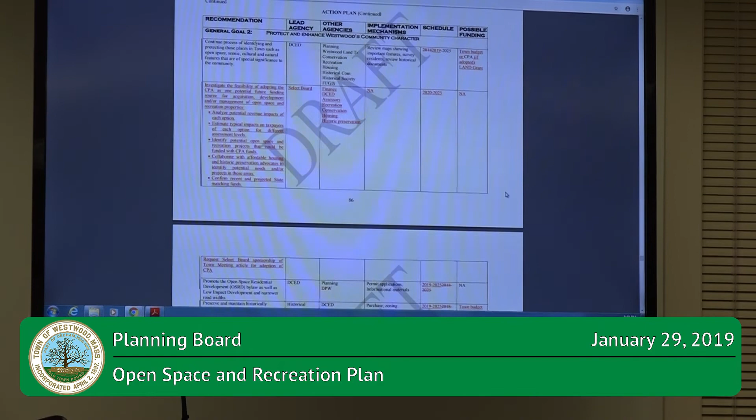Well, so in the action plan, it starts with your action item and then the responsible party. So we have the select board suggested in there, the way that you have it stated. Nora Loughnane, Director of Community and Economic Development. I just want to point your attention to two pages that were also revised regarding the CPA, Community Preservation Act.

Page 1 of the plan had a paragraph stating that a major recommendation of the Open Space Recreation Plan was the adoption of the Community Preservation Act. That's been removed. And on page 75, there's a section in the plan that discusses the Community Preservation Act, to explain what it is, and that has been revised to remove the clear preference of the Open Space Recreation Committee for adoption of that, to more describe what it is and not speak to adoption in the near future. So those are the major changes in that area.

Thank you. Can I just make a general comment about the plan? One of the things I'm struggling with is the plan, it's a good foundation, but it really only encompasses 5% of the population in terms of respondents. And when you look at 65 and over, if you calculate the percentages, only 38 people responded. So are we really incorporating what they want?

Well, the survey was one source that we used. It was done pretty early in the process, a little over a year ago. The main purpose of the survey was general public opinion. Then we had the vision session, hosted by the Open Space and Recreation Planning Committee. That was open for anyone to come to and really discuss the issues, and that's where they looked at the goals of the existing plan. Are they still relevant, and what do they want to see going forward over the next several years?